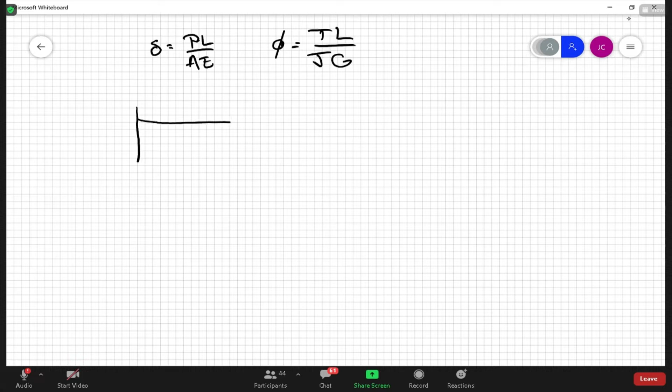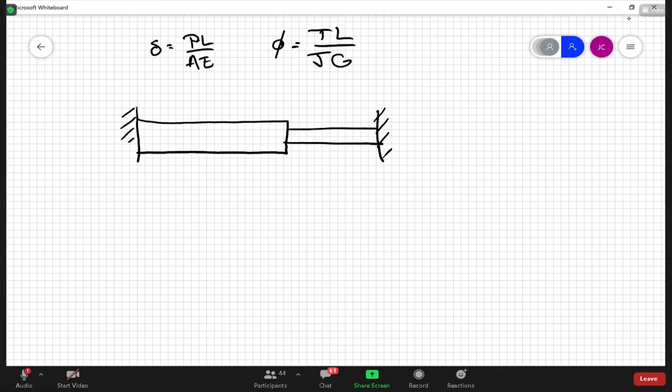Similarly, we may have a statically indeterminate axial problem like this example. This is statically indeterminate because we have unknown reaction forces at the two ends - it's constrained at both ends.

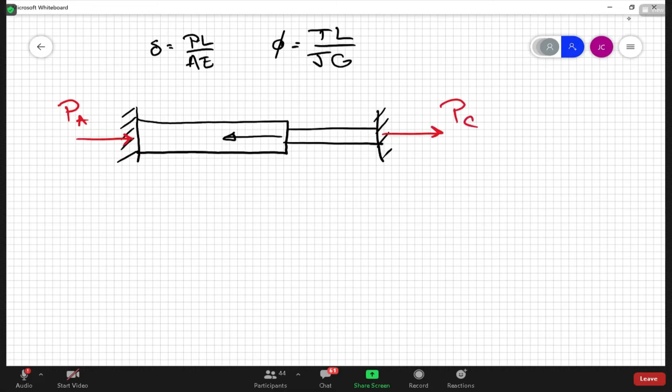So we can only do sum of forces: PA plus PC equals PB. We supplement that with the equation that the elongation from point A relative to C is 0. We use these two equations to solve this statically indeterminate axial problem.

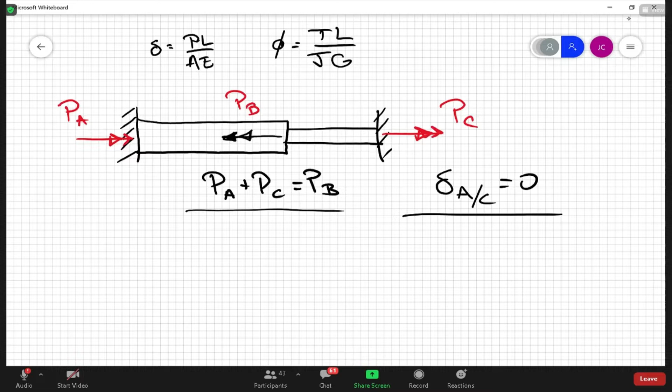We have actually the same exact situation for a torsion problem. In torsion, we can just replace the axial loads with torques. I know this is a bit of cheating here, putting like a double arrow on here, but the same exact analogous problem would be as follows.

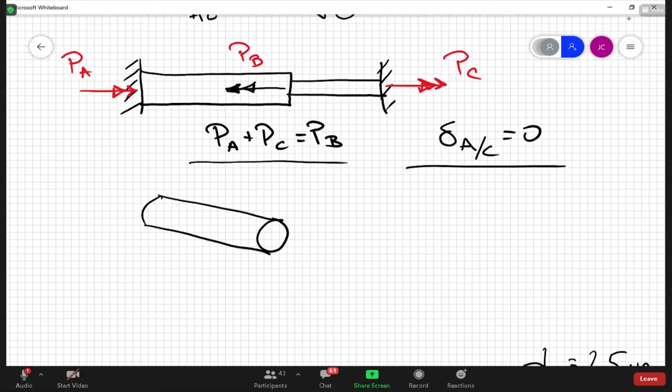If we had a system like this, fixed on one end - let's call this point A, I'm going to call this point B, and it's also fixed here at point C - and there is a torque applied at B, we have reaction torques at A and C.

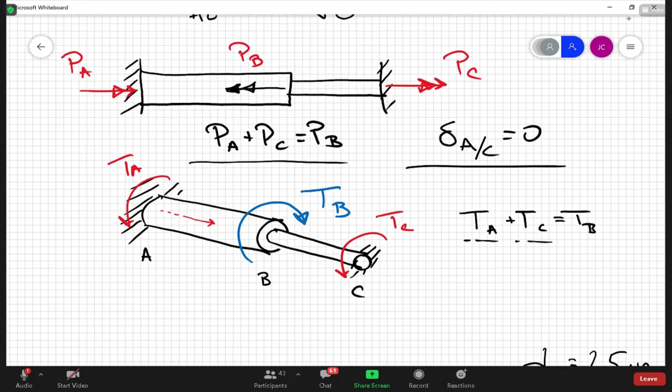And if we do sum of moments around the axis of the shaft, we get that the torque at A plus the torque at C has to equal the known torque at B. But we have two unknowns, the same way as we had two reaction unknowns for the axial problem. So we can only write one equation of equilibrium, but there's two things we want to find - we need an additional equation.

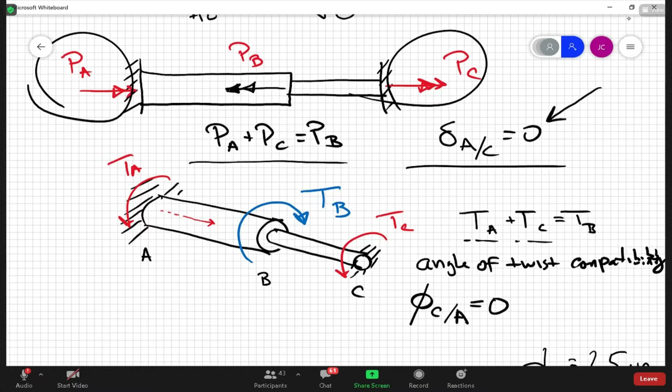So it's going to be supplemented by another compatibility equation, but obviously it's not going to be on the elongation - it has to be a compatibility condition on the angle of twist. Here, the angle of twist of C relative to A has to equal 0. Everything else goes the same way. Let me just delete all this nonsense.

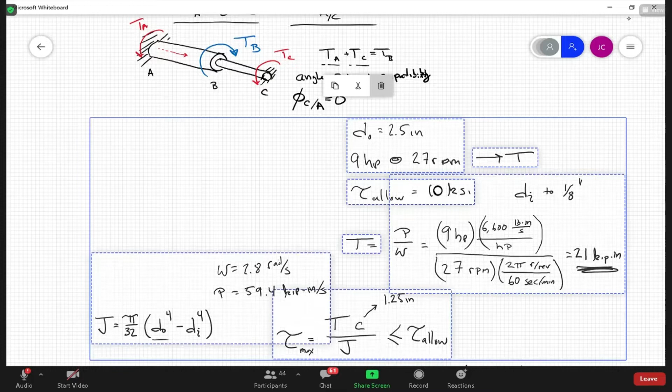So again, if we look at something like this, just like when we had the compatibility condition for axial, we can write this as the angle of twist of B relative to A, the angle of twist of this section, plus the angle of twist of C relative to B, this section, has to equal 0.

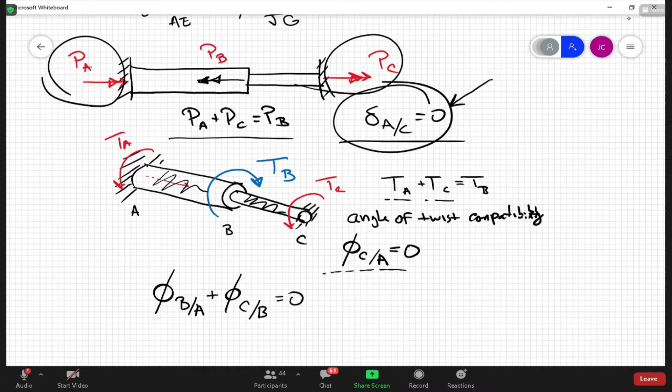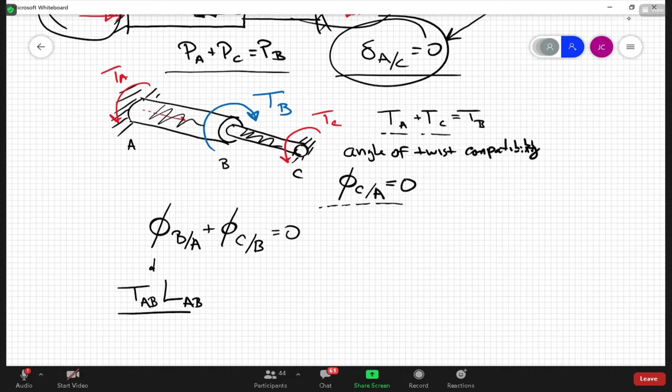And we can then use free body diagrams to get this in terms of the reaction forces. So for example, this term here we can rewrite as the torque in section AB times the length of AB over J, but that's J for this section AB as well, times G. Let's assume it's the same material for both, but if it's a different material, you could have G for AB. And this term here is going to be the torque in shaft BC times its length over its J times G, and that all has to equal 0.

So if we were to look at a free body diagram that cuts through AB, we would see something like this. Here is the unknown reaction torque at A, TA. Now if we use the right-handed rule, to be consistent with the axial problems, here's the outward normal. If we do the right-handed rule, that would mean that the internal torque, its positive sense, should be in this same direction. So this is the internal torque in AB. And if we do sum of moments around the x-axis, if we call this the x-axis, then you can see that that internal torque TAB has to equal negative TA.

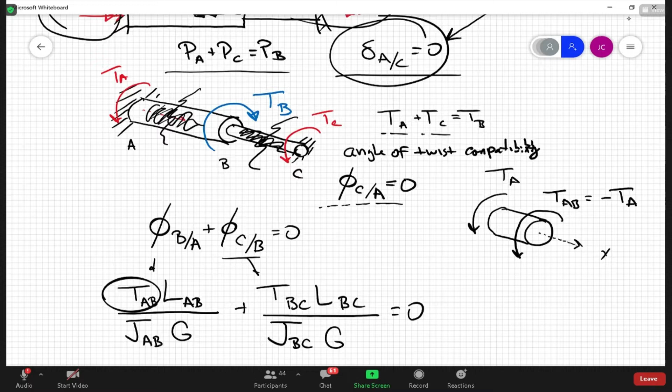And likewise, we can do the same cutting through section BC. Draw a free body diagram for that one. Here is the unknown reaction torque at point C. And again, if we use a right-handed rule to expose the internal reaction torque, here's the outward normal going in that direction. And if we curl our right hand so the thumb points in that arrow, that gives us the positive sense for the internal torque in section BC. And in this particular case, from this free body diagram, you can see that that does equal TC.

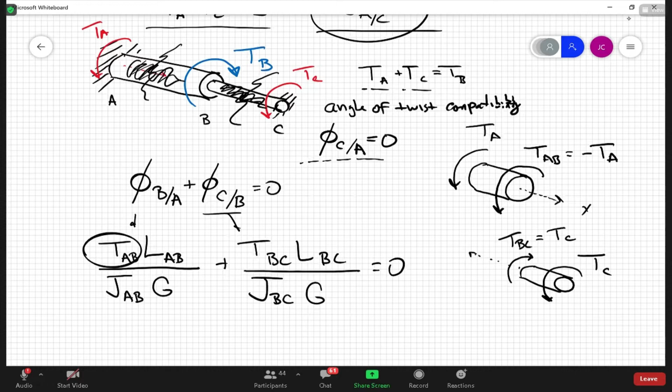So we can substitute those into here. And now we have minus TA, LAB over JAB times G, plus TC, LBC over JBC times G, all equals 0. So now we have a second equation that we can solve simultaneously with the equilibrium equation. And we have two equations that we can solve for the two unknowns, TA and TC.

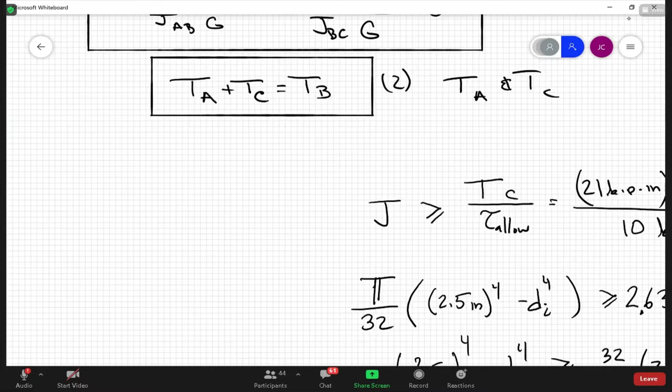Obviously I'm going to do actual problems, right? But I want to do it with letters now, just to show you that it's really the same approach. So everything we did before, we can do for torsion. So we could have the problems where, obviously the one that I just did there was two elements in series, but you could also have a problem that looks like the following.

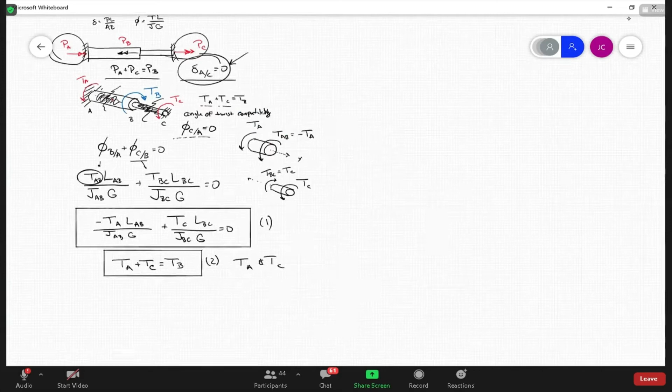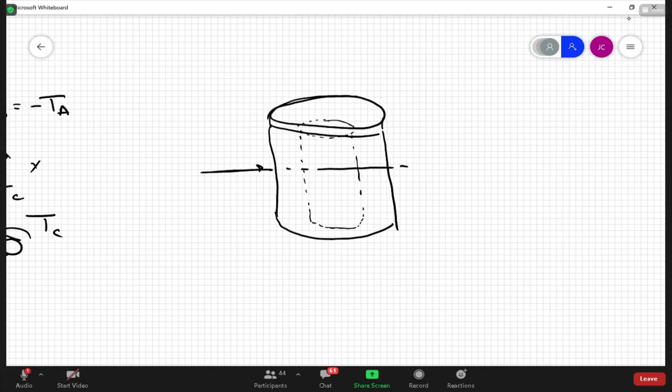Let me zoom in. There we go. You could have like a top plate, I don't know how to draw this really well, but you can imagine inside here. So if we did a cross section, we would have two different materials. This would be an inner material and then an outer material. So this would be two elements in parallel. Let's say this is steel and this is brass. I don't know why, but let's say we did that. Then in this particular case, we apply a torque onto here.

So that torque equals the torque from the steel plus the torque from the brass. That's our sum of moments around this. If you want, we can call this the z-axis. And we don't know TS or TB, these are the torques, the interior reaction torques from the steel and the brass section, respectively. But we could augment this with a second equation, a compatibility equation, and it's going to be the same as when we had the axial elements in parallel. The angle of twist of the steel has to equal the angle of twist of the brass section. So that's the way it would work.

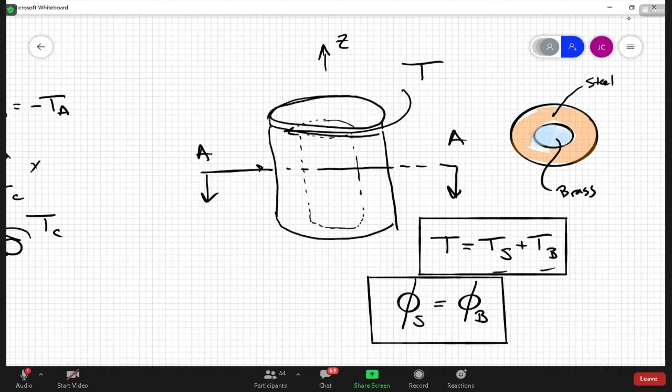You can solve this in the same exact way using either this direct approach with the two equations for the two unknowns, or you could also use a method of assumed forces, or method of assumed torques. You could remove one of the supports, make torque C have a value of 1 kilonewton meter, use superposition, and scale that torque at C so that the total twist is 0. Same stuff, all right.

All right, so let's see if I can do a problem, okay? Let's find something. Well, I'm looking for a problem.

This is always an area that I think has a bit of a discontinuity in the curriculum. How many people have been exposed to gears? Just comment, turn on your mic and say it, because I'm not looking at the screen. And if so, what classes have they talked about gears in? Because I don't think you do it at all, right? I think so. All right.

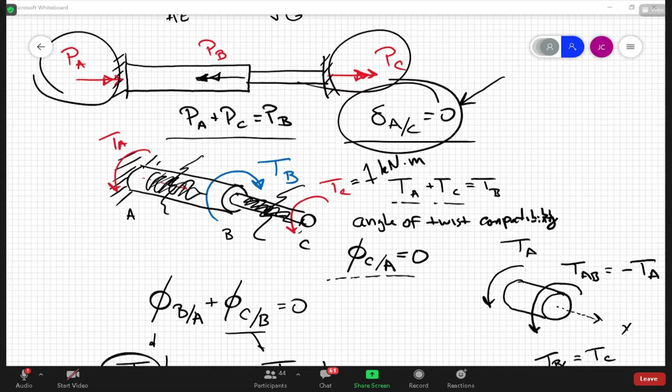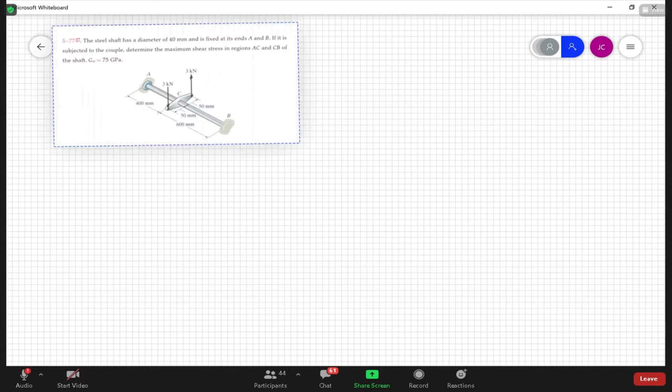All right, so this is problem 577, pretty easy, very similar to what I just kind of quickly sketched out earlier. We have a solid circular steel shaft, 40 millimeter OD. It's fixed at both A and B, and they give you a couple here at point C. They want us to figure out the maximum shear stress in AC and CB, and where it is. So this is statically indeterminate, okay? And you can see that here.

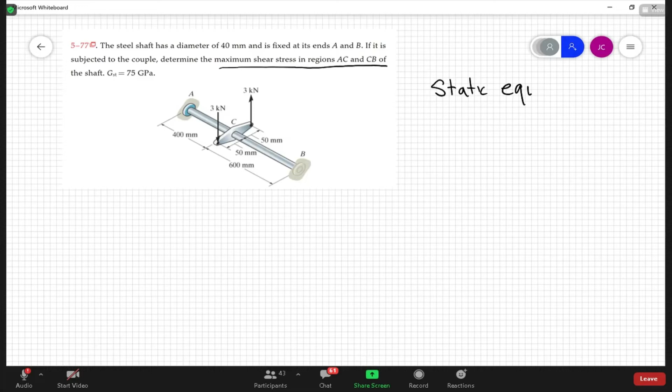I should mention, it doesn't really show up in axial problems, but when we talk about something being in static equilibrium, that doesn't necessarily mean the body is not moving. Static equilibrium means no acceleration. Moving with constant velocity is still being in static equilibrium because the sum of forces is equal to 0. So we didn't really see it in axial problems, but in a lot of problems where we have power being transmitted through a shaft, whether it's by gears or belts or whatnot, we will very often have a situation like the following.

This problem could be replaced by something that looks like the following. Let me just do this. Imagine that couple torque was provided by an intermediary gear that went off to another gear in a gear train. What is going on? Stop.

And here they might give us a gear force, say they give that, and there's gears being offloaded onto this. So this whole thing is rotating with some speed, yes, it's rotating, but that doesn't mean it's not in static equilibrium. So a problem like this is actually identical to this problem. Here they have points A and B fixed, but don't be confused when you see a problem that looks just like this, but the whole shaft is rotating with some constant speed. It's still a static equilibrium problem. This gear here is still exerting a reaction torque onto this gear, and this gear here is exerting a reaction torque onto this gear.

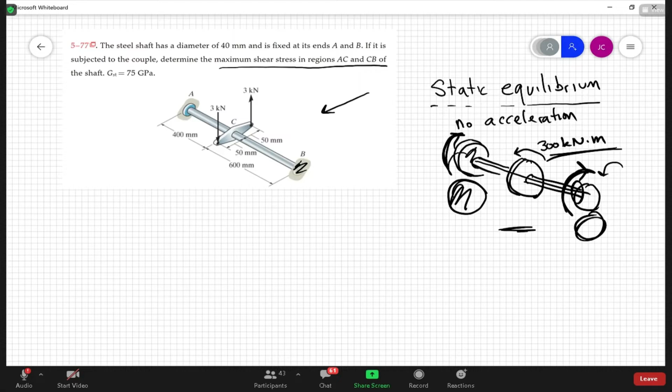These unknown reaction torques still have to be in equilibrium with the 300 kilonewton meter torque applied on the intermediary gear, and you know the total angle of twist still has to be 0. So the same stuff works, okay? But this one is like fixed, okay? All right.

So I'm going to replace here, right? Reaction torque A, reaction torque at B, okay? And this couple produces a net torque of, it's 3 kilonewtons acting at a moment arm of 100 millimeters. So that is 0.3 kilonewton meters, or 300 newton meters, correct? So that's what's going on here. It's analogous to this one.

All right, so we can call this the x-axis if you want. X, Y, and we can call that the z direction. So if we do sum of moments around the x-axis, that is going to give me the torque at A plus 300 kilonewton meters plus the torque at B equals 0.

All those torques, the way I drew them, were right-handed sense, so obviously the torques at A and B are going to be going the other direction, but that's fine. I'm just going to leave it that way for now. We don't know this, and we don't know that, right?

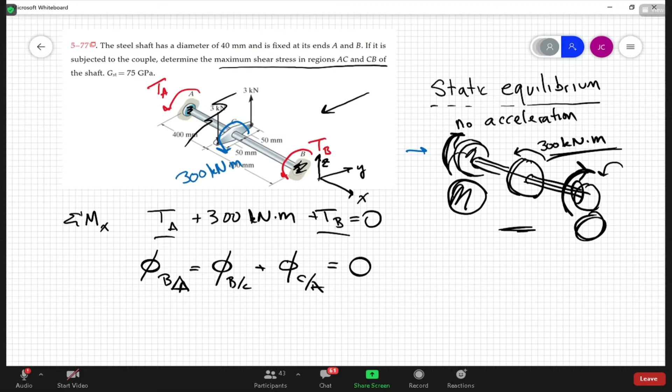So if I were to again put a cut through section AB, just like I just drew before, we could see the internal reaction - well, I should just draw this, shouldn't go too far. All right, so here is torque at A, and if we do a right-handed torque here, this is the internal reaction torque in shaft AC, and that has to equal negative A, okay? And likewise, we can do the same here.

Let's do it this way. So here is the internal reaction torque in shaft BC, and here is my support reaction torque B. All right, so in this particular case, this is actually equal to torque B.

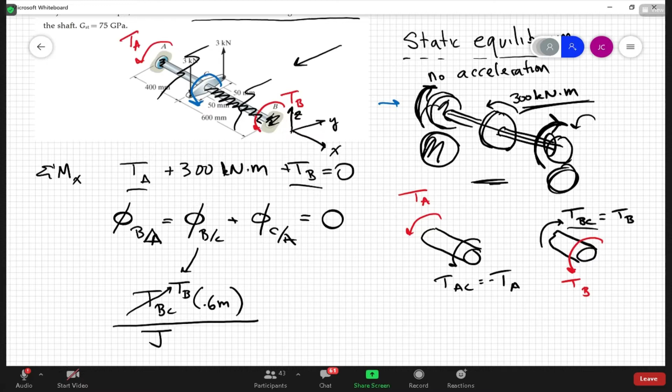All right, so now I can rewrite each one of these terms. The angle of twist of section BC is the torque in that section, which is torque BC, but we know that is going to equal the unknown reaction torque at B times its length. The length, well, I wrote over this - what is that? It's 600 millimeters, so the length is 0.6 meters. We're going to divide that by J, but J is the same for both, and G is the same for both, so I'm just going to leave them there like that for now, and you'll see why in a second.

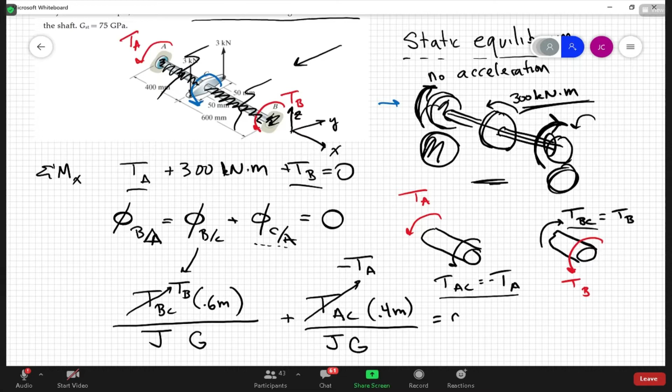Now we have the angle of twist in section CA, so that one is going to equal the internal torque in AC times its length, which is 0.4 meters. This internal torque here from this free body diagram equals negative TA, and this is also over J times G, and all that equals 0. So you can see here why I didn't really have to calculate J or G, because I can just multiply this equation by J times G.

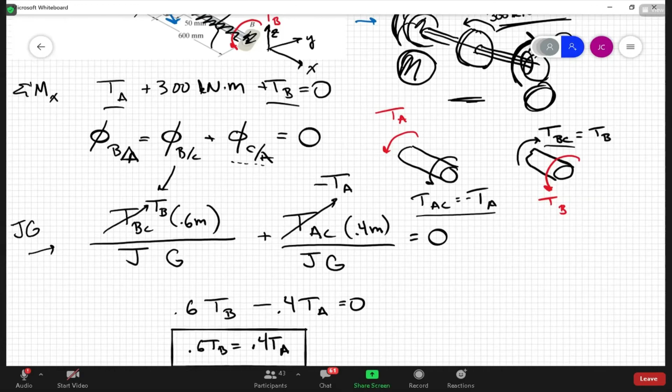And I'm just going to get 0.6 TB minus 0.4 TA equals 0, or in other words, 0.6 TB equals 0.4 TA. So that's our compatibility condition, kind of tweaked a little bit or simplified. And we still have the equilibrium condition, TA plus TB equals negative 300 kilonewton meters.

So this is relatively easy to solve. We can use the compatibility equation and easily substitute that into the equation below. So let's get rid of TA. TA is equal to 6 over 4 TB, which is 3 over 2 TB. And if I take that and put it into this equation, that's going to give me the following: 3 halves TB plus TB equals minus 300 kilonewton meters.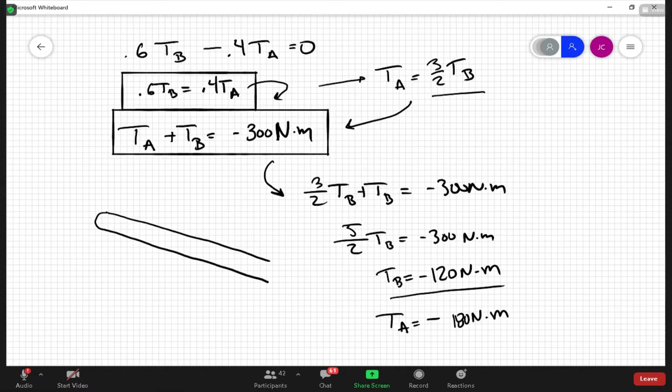All right, in the middle at point C, we have the 300 Newton meters here. At point A, we have the reaction torque - it's going in the opposite direction, right? It's negative, so it's in the opposite sign of the way we drew it. Let me zoom out so you can see that. Right, I originally drew it up here in the right-handed direction around the x-axis, but it's a negative, so it goes the other direction, and that's point A.

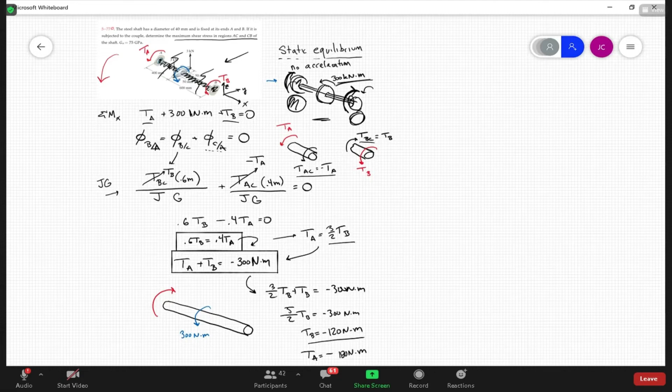So this is 180 Newton meters. And likewise, at B, it also goes in the opposite direction, and it's 120 Newton meters. Okay? So thankfully, 120 and 180 add up together to give you 300, right?

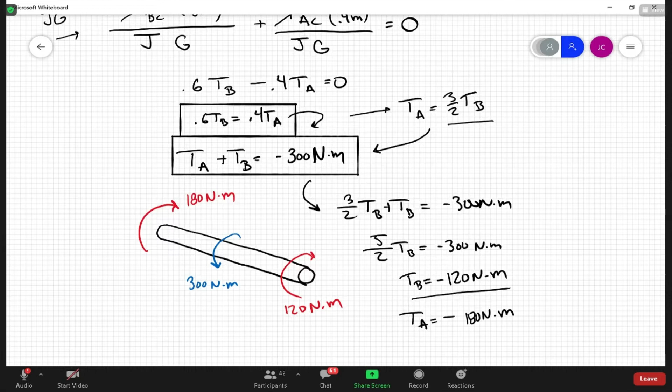So now we know the reaction forces on this shaft. The problem wanted us to know what is the max shear stress, right? What is the max shear stress in AC or CB?

All right, so here we're going to use, now that we have the forces, the torsion equation, tau equals TC on J. I guess now I will have to calculate J, but that's fine.

So which one is going to have the greater stress? Section AC or CB? Is it going to be here? BC? Yeah, how do you know?

Well, because if we cut section AC in half and solve for the internal torque, it would be 180 Newton meters. And if we do the same to the other side, to BC, it would be 120 Newton meters, and 180 is higher than 120.

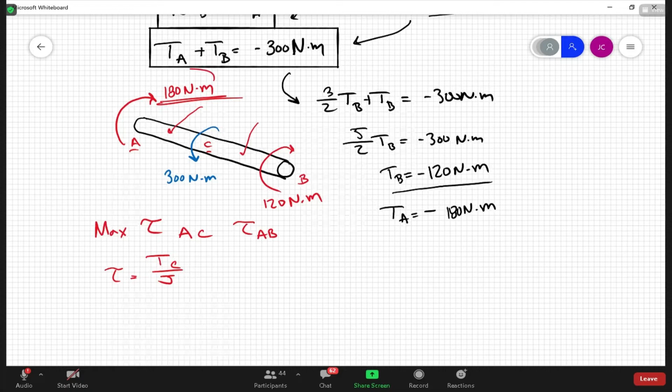But I do want to state, and you said it perfectly, so good job. You said draw the free body diagram that shows the reaction force, right? It's not that this is 180 and this is 120, but the internal reaction force here is 180, and in this particular case, the internal reaction force here is 120. 180 is greater, so that's going to be the limiting case.

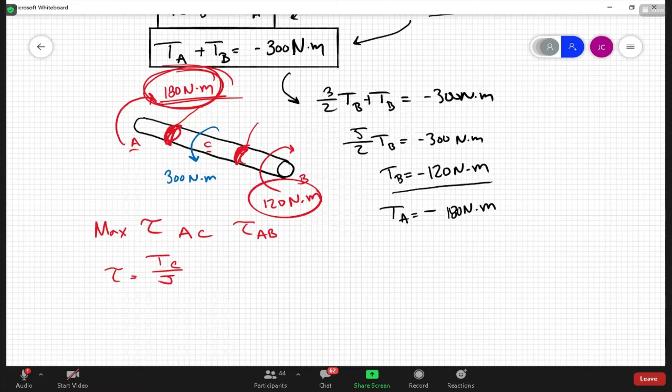Yeah, perfect. All right, so it's going to be in AC, and that's because in section AC, the internal torque is 180 Newton meters. Okay, and actually, technically, to be correct, should it be negative? No, actually that was positive.

What's going on here? Why is this... okay. C is the radius, and it said 40 millimeters, so that is 20 millimeters or 0.02 meters, and J is pi over 32 times that diameter, 0.04 meters to the fourth power, which equals a very small number.

0.251 times 10 to the -6 meters to the fourth power. So now we can plug all that stuff in, and that's going to give us tau equals 180 Newton meters times 0.02 meters over 0.251.

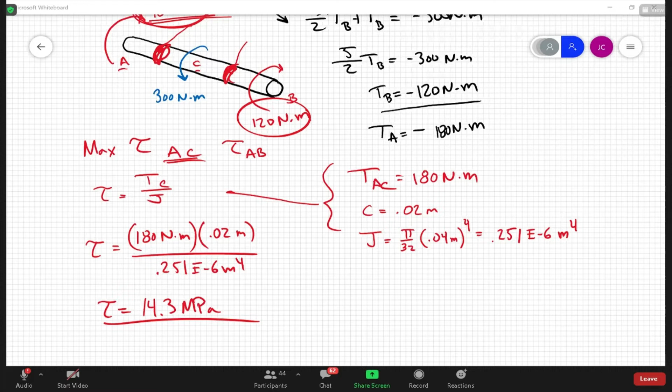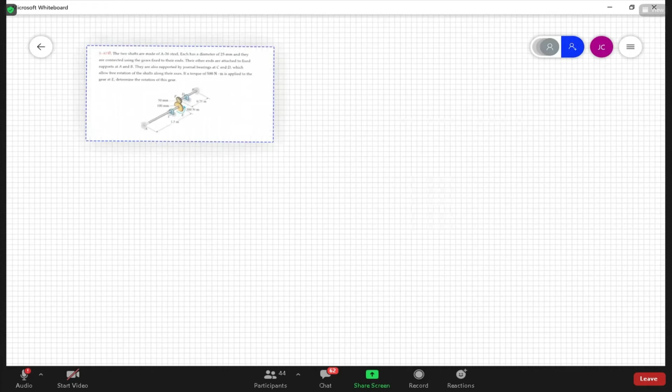Right, not just any gear, but a gear problem. All right, so this is a tough one. Okay, so here we have two shafts that are connected by the spur gear pair shown here, okay?

And it says the shafts are fixed at their other ends, A and B, but honestly, more typically, those aren't going to be fixed, but connected to other gears or pulleys or some clutch driving a component, and there's probably power being transmitted down these two shafts. But again, a static problem is constant velocity as well as no velocity.

Okay, so obviously here we have unknown reaction forces at A and B. Let's set up a little coordinate system to make my life easier. I'm going to call this the x-axis. I'll call this y and z, although we really don't need y and z, but might as well close it out.

All right, and if we do this all in the positive sense, let's just draw the unknown reaction torque at A around the positive x-axis. Are we good? Okay, we'll do the same at B. So those are my unknown torques, right?

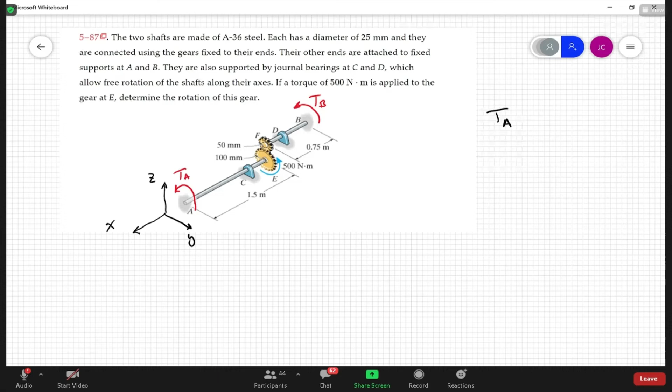And clearly we have a statically indeterminate problem here, right? So I can write equilibrium for the whole system: TA plus TB plus 500 Newton meters equals 0. So that's just sum of moments around the x-axis for the whole system, right?

But obviously, I've got one equation for two unknowns, so this is statically indeterminate. I need a compatibility condition. So how do we do this? What is the compatibility condition I'm going to use here?

What's the kinematic condition we can use? I need another equation, right? Are y'all asleep?

Could it be that the strain of AE equals the strain of FB? No, not the strain, right? So remember, we're usually always going to... oh, maybe there's a way you could do it with strain, but it's usually in terms of the motion, because the strains don't have to be equal. Strains and stresses don't have to be equal. Forces balance each other out, right?

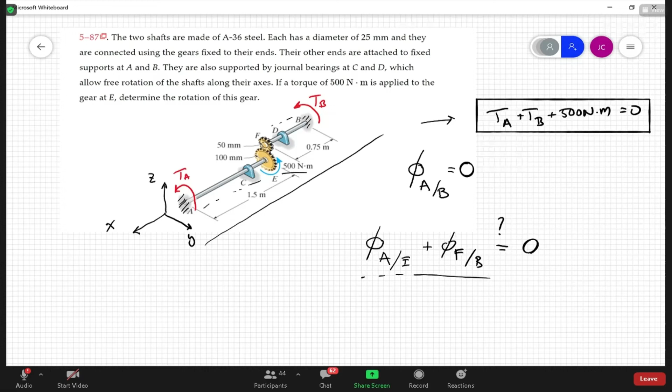Why is this problematic? What is the issue we got going on here? You can even just tell me physically what it is. It's those things in yellow, right? The gear, or yeah, it's the different gears' radius, right?

So if let's look at this angle of rotation, right? If E, let's just say for example, let's say this gear here, gear E, let's just say it rotates 360 degrees. Now, again, this is looking down the x-axis, 360 degrees in a clockwise manner. How much does gear F rotate?

See, before, when it was one continuous shaft, it was easy, right? Because before, what we would have had was A, B, and then all this nonsense here with the two gears would have just been like point C, and they would have just given you the one torque here of 500 Newton meters, right? But we don't have that now. It's a little more complicated because of those gears.

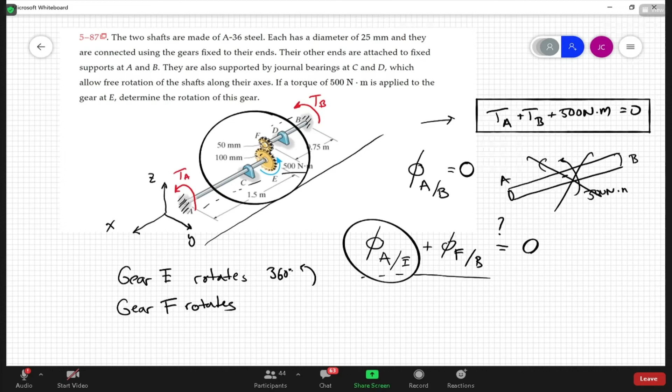Right, you're saying, okay, it has to do with the fact that the gears are in contact and you have this gear reduction ratio, which is related somehow to the diameters of the gears, correct? Yes. All right, that's true. How come you said a half and not twice?

Because, oh, did I say it would rotate twice as much, or? I forgot what you said, half. Did you say half or twice? I think you said twice. Okay, how come you didn't say half? I was gonna say half at first, but since I just like imagined it kind of... since this one's bigger, it rotates one time, and this one doesn't have to rotate as much. I don't know how to explain it.

That is perfect, that's exactly right. But the way we can do it, we can say it a little more mathematically, is if we draw the two gears, right? So you would have a bigger circumference in gear E in that case. Exactly. What happens is as the two gears rotate...

Let's say here's a reference point on gear E, and I'm just going to rotate it a little differential amount, right? Let's call this D phi E, right? So the arc length that it sketches out is here. That has to be the same arc length. The two gears roll in contact, there's no slip, so these two arc lengths have to be the same.

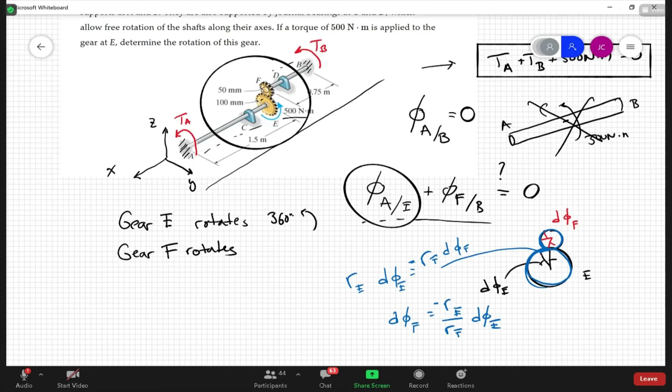It's always going to be associated with the ratio of the two gears. In this case, since one gear is twice the other, it's either going to be 2 to 1 or 1/2. The way I always remember is I try to visualize it, like Max said: the bigger gear, since it has a bigger circumference that has to match the circumference on gear F, in the time it takes to do one rotation, gear F is going to have to do more rotations. So it's going to be twice as much.

But this is the way it's shown mathematically. If you look at this, the radius of gear E is twice the radius of gear F, so this gives you that. The angle of twist of F is -2 times how much gear E rotates, okay?

So first of all, you always know if one gear is going clockwise, the other one's going counterclockwise, right? And the ratio has to do with the ratio of the gears. I always get confused as to whether it's twice or a half, assuming the gear ratio is 2 to 1 or whatever the gear ratio is.

The way I remember is I do what you were saying: I try to visualize it in my head, and I realize the smaller gear goes faster than the bigger gear. That gives me a check as to whether it's 2 to 1. Or if you're really quite adept with the abstraction of math, you can just do this, but I usually do that better.

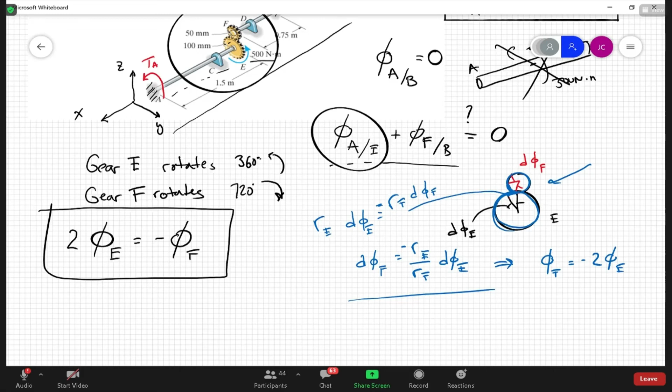So if it rotates 360 degrees, gear F is going to rotate twice as much as that, so that's 720 degrees, and it's going to rotate in the other direction, okay? Or in other words, the angle of rotation of gear E is always going to be equal to... does that make sense? So now I used exactly what you said as far as the physical intuition of how this happens, and I've written it mathematically.

So now, okay, I've really made this complicated. So how do I move forward from here?

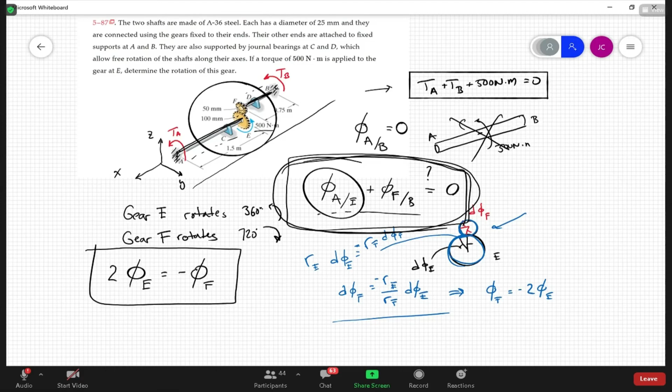Let's take a step back. We wanted to somehow deal with this condition that the total rotation from A to B is 0, okay? But this equation that I wrote here really does not work because, if you look at this, basically what we're saying is whatever the first shaft rotates, the other one has to rotate by the same amount, but in the opposite direction. But that doesn't make sense because there's this gear reduction ratio. So how do we take account of this?

What can we do? Would it be the same equation with just including the 2 on the angle of E? Yeah, this one's actually not too bad, right?

Now, remember when I wrote these phis, these phis are actually like the rotation of gear E and the rotation of gear F. But let's be a little more careful. Let's do it a bit more formally. So we want a relationship of shaft A relative to E and something involving the rotation of shaft F relative to B, right?

So let's look at this for the first shaft. A is fixed, right? So how can we relate the rotation of A relative to E? I should use a different color here... I'll use this crazy color. We want the rotation of face A relative to gear E. How is this related through to this?

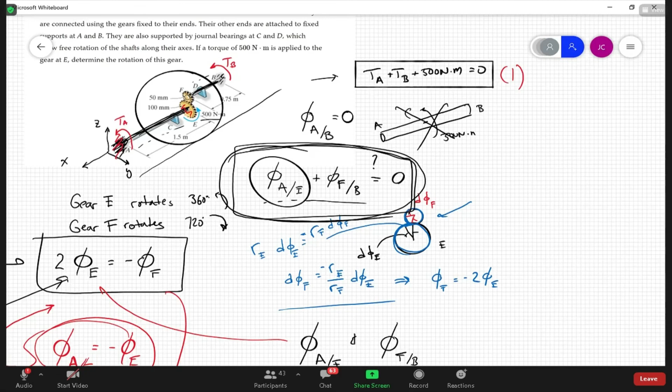Is there any questions on that while I try to get my screen unlocked? There we go. Okay, so now for this one, what we can do here, right?

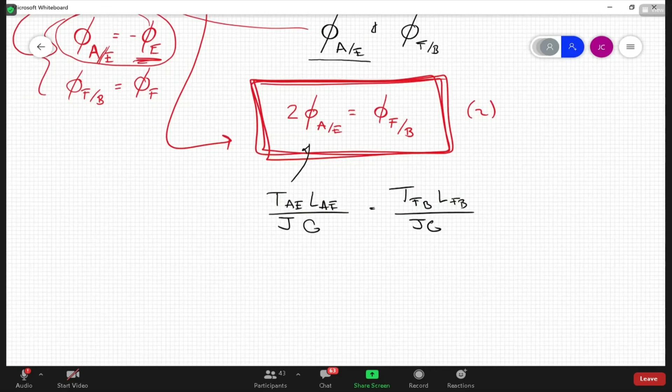This is going to be just simply the torque in AE times the length of AE over, and I think they're the same shaft, so it's J and G, and that equals the torque in FB, length of FB over JG. We can multiply by JG, they cancel out, right? The length of AE, I should just look at that, is 1.5 meters, and the other one is 0.75.

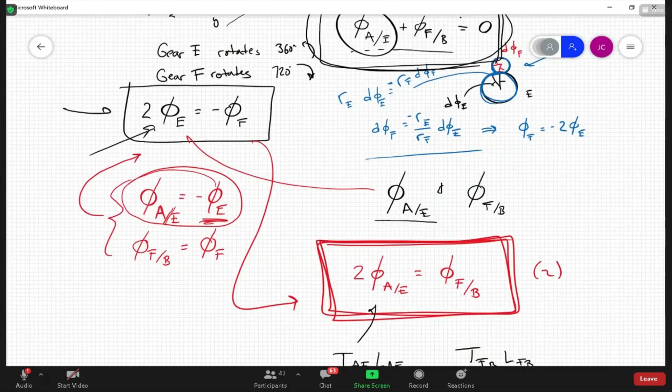Oops, sorry, so I got in front of my two. So, 2 times the internal torque at AE times 1.5 meters has to equal the torque in FB times 0.75 meters.

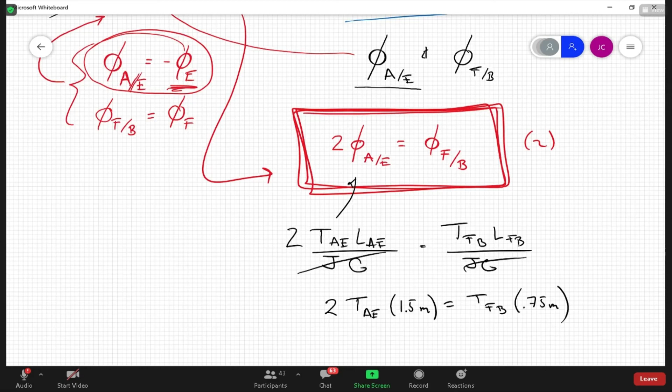And now we want to use the free body diagrams to get these in terms of the reaction torques. So let's look at that real quickly. I know it's the end of class, but okay.

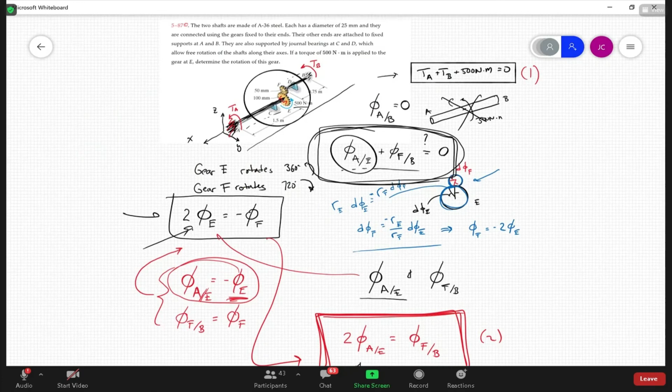So if we go back to here, if we draw a free body diagram, excuse me for doing what I always complain about, making sloppy free body diagrams. Here is torque A, and then this would be the torque, the internal torque in AE, right? And so that's going to equal torque A, just using the right-handed sense on everything.

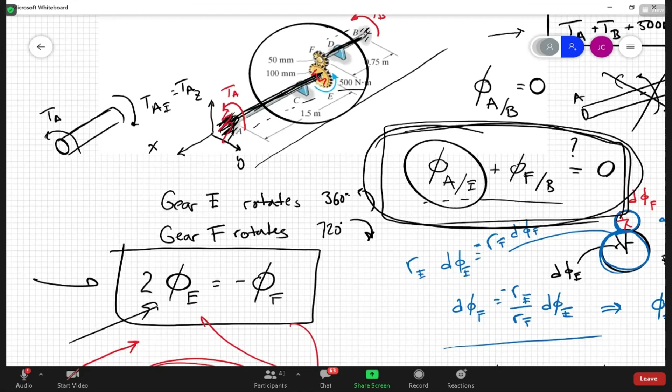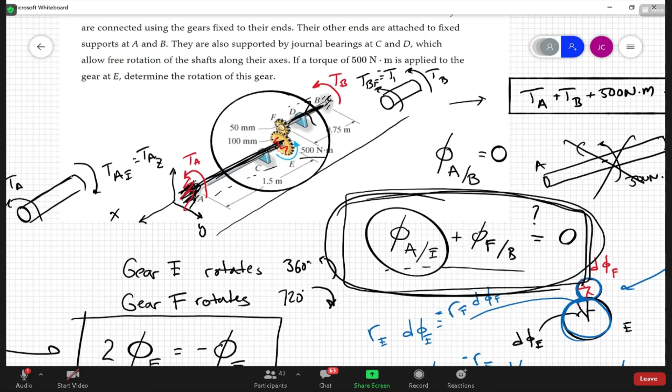And if we do it for here, we're going to get torque B going that way. And again, if we use a right-hand rule, this is the internal torque in BF, which equals minus the reaction torque at B. So now I can substitute those into here.

So I get, 2 times 1.5 is 3 times the reaction torque at A equals 0.75 minus the reaction torque at B. Okay? And so there you go, you can solve that out. All right, that's the end of class, but anyway.

Okay, any questions on that? That one's a little tricky. I think if you just physically think about it, how it rotates, but also try to back that up with writing the mathematical equations. They're not super complicated equations, it's not like Schrodinger's equation.

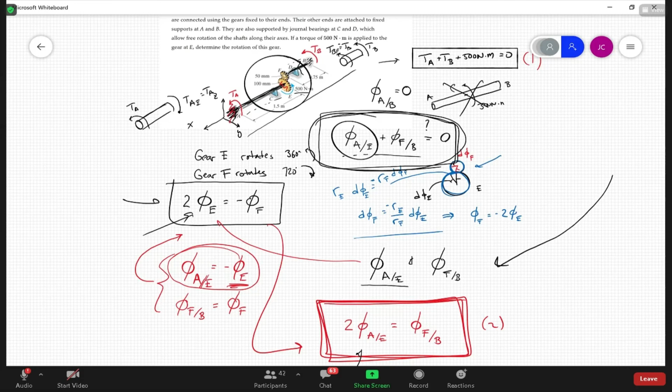I think it'll help you get some confidence in solving these problems where you have to use your spatial abilities to get through the complexity of the problem. This problem is not any more difficult than the problems without the gears, from a sense of mechanics of materials, but obviously trying to do the spatial bookkeeping of what happens because of the gears is what makes it complicated.

This happens a lot in engineering problems, but I still always maintain, if you go slow, try to physically think it out, but also try to express what your physical intuition is mathematically. That's the thing that allows the problem to kind of fall apart. Okay, all right, let's stop there.